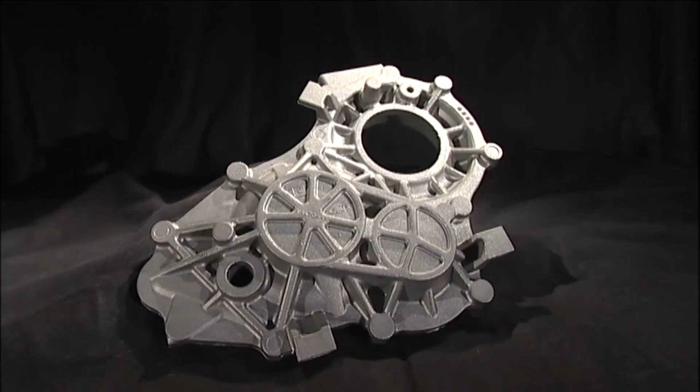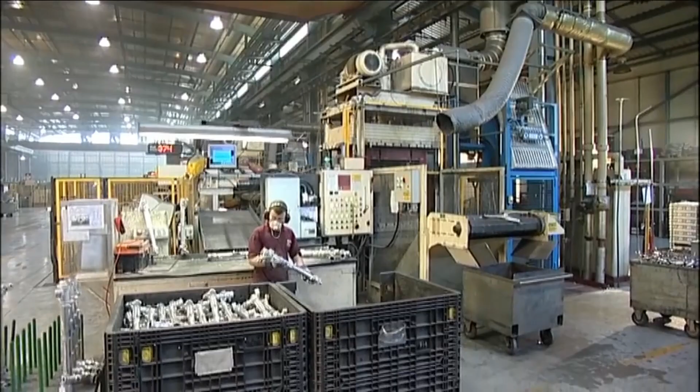The aluminum casting industry plays a major role in the automotive and aerospace markets. It is witnessing considerable growth due to advancement in technology and rising demand from the transportation sector. The electric vehicle market, in particular, is driving demand for high-strength, lightweight materials that can replace traditional steel.

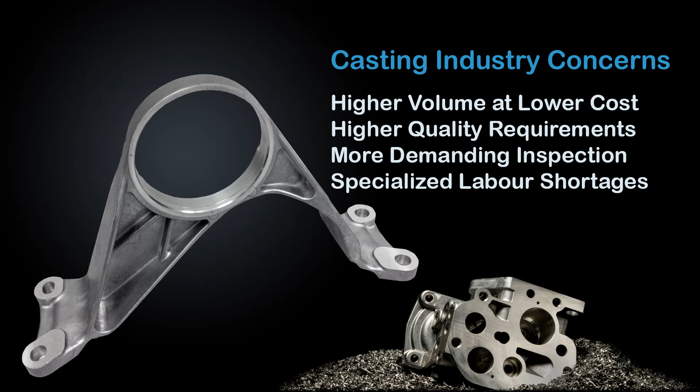But this trend faces major challenges. Part manufacturers are expected to produce more parts at lower cost, while meeting higher quality requirements. Safety concerns and increasingly complex design make part inspection more demanding, while specialized labor shortages add pressure on part manufacturers.

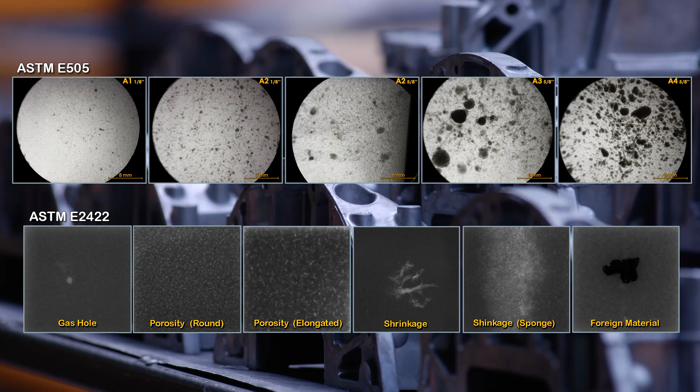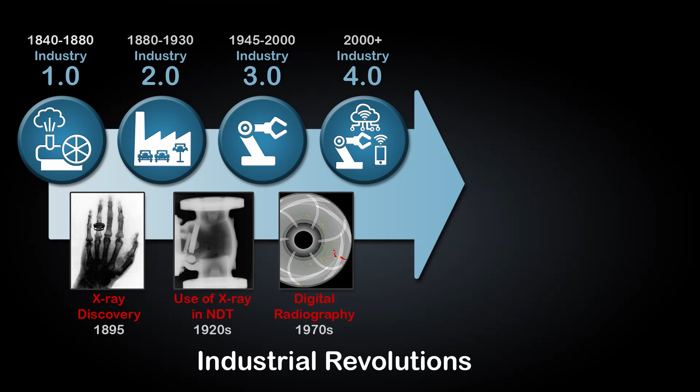Casting imperfections are unavoidable as they are inherent to a complex process very difficult to master. X-ray technology is the preferred inspection method for castings since it can see these imperfections. X-ray has been around for more than 100 years. In recent years, digital technology has significantly improved industrial X-ray capabilities, but despite the introduction of more advanced technology, inspection methods have remained essentially the same.

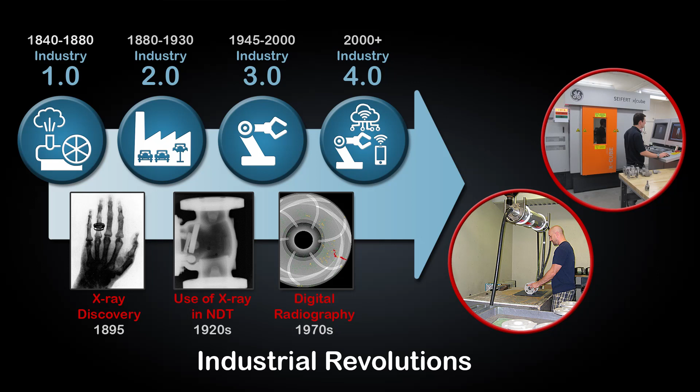Radiography is still considered to be a labor-intensive and a very costly inspection process. There's got to be a better way. This is where predictive 3D radiography comes into play. Predictive 3D radiography is our patented technology that combines X-ray physics with 3D analysis, simulation, and artificial intelligence.

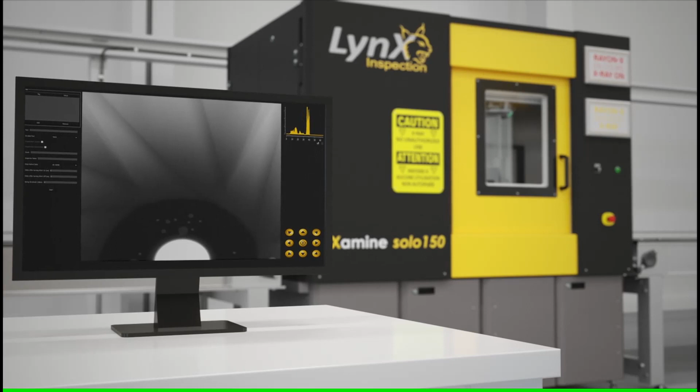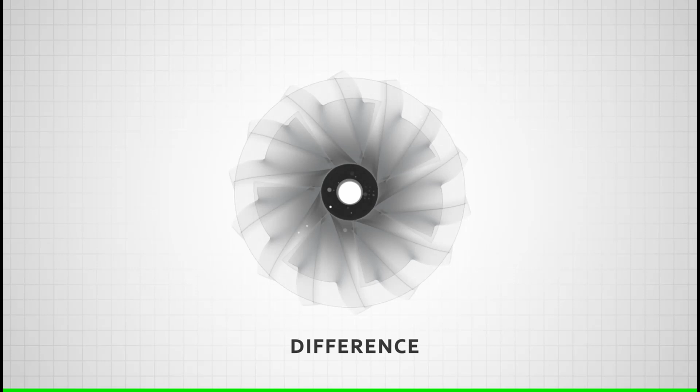It fully exploits all the available information to provide unique automated capabilities that are efficient, very fast, tailored to client needs, and much less expensive than traditional methods. Based on inspection standards and business rules, it delivers comprehensive results that can easily be interpreted by the end user or drive a fully automated inspection process. With predictive 3D radiography, 100% inspection is now possible and cost-effective, even for high-speed inline applications.

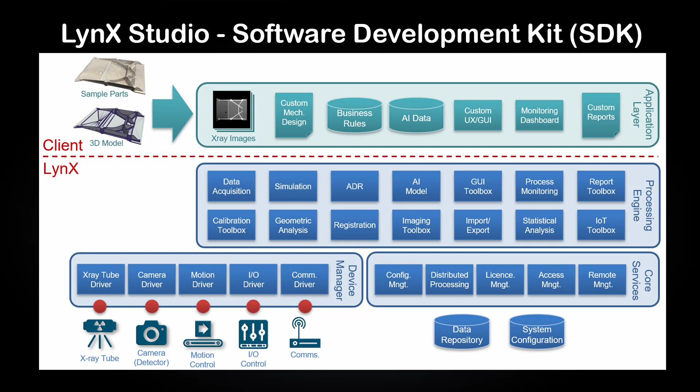What's making all this possible is LynX Studio, the very first software development kit designed specifically for high-performance industrial X-ray inspection applications. LynX Studio is a computer vision library with all the individual software modules needed to build custom X-ray applications that are modular, vendor-agnostic, highly scalable, and that take full advantage of the parallel processing power of GPUs.

The framework in LynX Studio uses stateless programming principles, where each component is available through an object-oriented data structure. Individual modules are called programs that can be configured and executed independently from each other or in a predefined sequence. Programs are attached to stations that connect to devices before execution. Each device can easily be configured through a set of parameters.

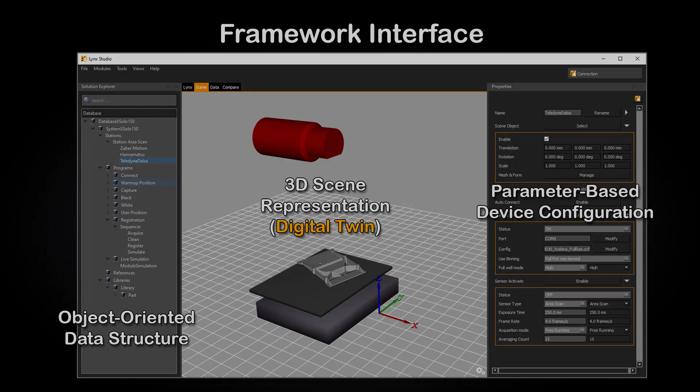Programs can be executed from within the framework, from a dedicated GUI, through command lines, or even a web interface. The same program can be executed more than once, and multiple programs can be run simultaneously. One of the key features of our SDK is a real-time X-ray simulator. The simulator can be used to provide a digital representation of the real-world conditions, also known as a digital twin.

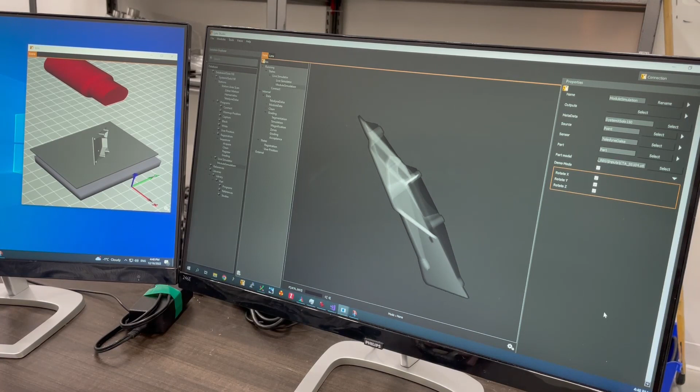A digital twin can be used to validate scanning parameters, find optimal viewing angles, or test the individual steps of a workflow sequence, for example. But simulation is also used in other areas, such as helping with image registration and 3D positioning, performing scaling assessment, finding anomalies against a reference model, and even building multiple test cases to optimize deep learning model training.

But the best way to demonstrate the real power of the SDK is to show a real-life example. The following demonstration shows how a sequence of events are being used to generate automated defect detection results. Taking a sample aluminum casting, the program starts by positioning the part in the cabinet to acquire an X-ray image. It then cleans the resulting image based on calibration data, then performs a registration of this image in 3D space and generates the corresponding 2D projection and scaling map that can be used for grading.

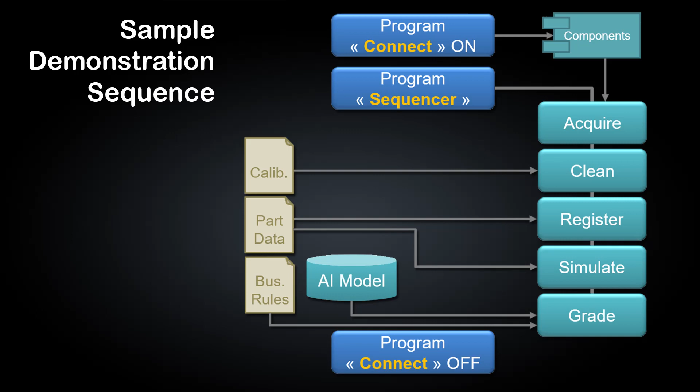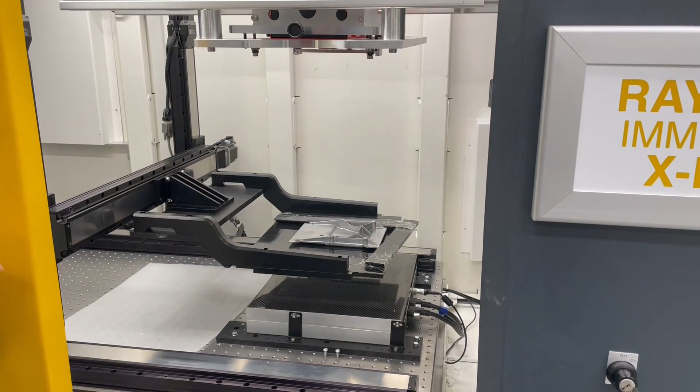Finally, it finds all the individual indications using the deep learning AI model and grades the overall part by assessing these indications against the reference standard and business rules. First, we place the part inside the cabinet and close the door. We're now ready for scanning. Then we activate the program.

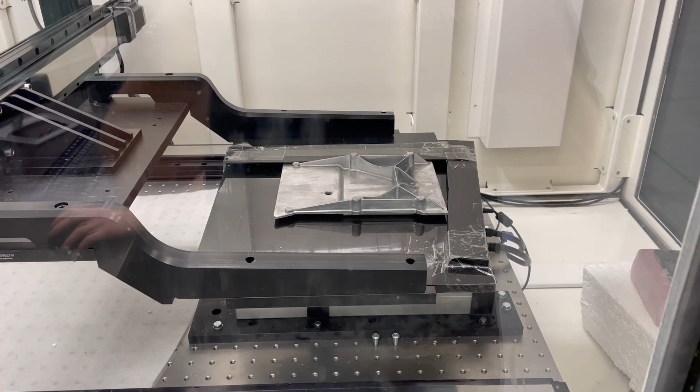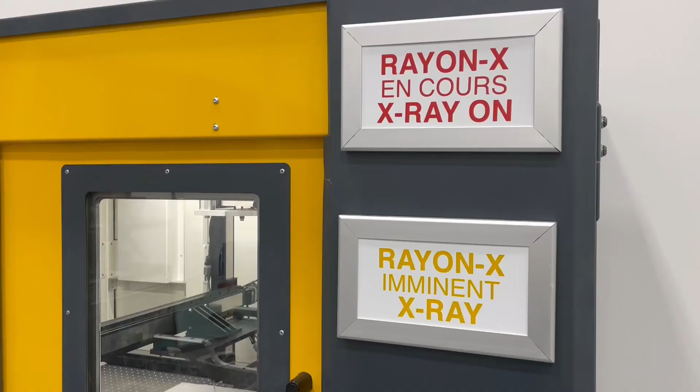The part moves into position. X-ray is turned on and the image is acquired. From there, all the processing steps take place in just a few seconds. Total elapsed time between X-ray on and grading results is around 14 seconds. All the intermediate results are available for review.

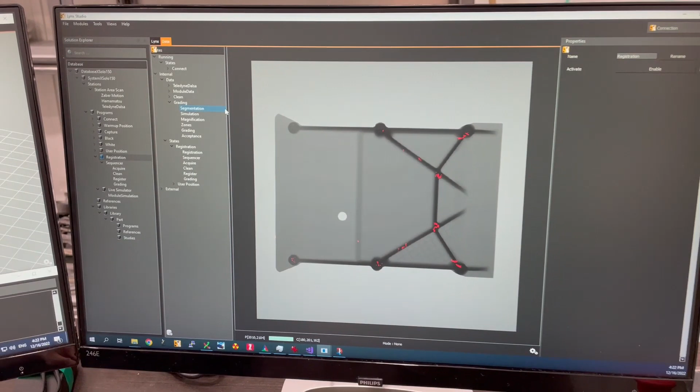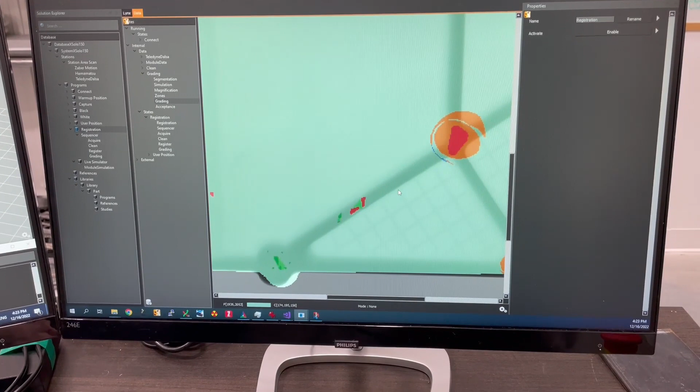These include the segmentation results, the simulated image, the magnification map, the projected regions of interest, and of course, the overall grading results. As we can see, some of the indications exceed the acceptance criteria and show up in red, while other indications are acceptable and remain in green.

Note that this program will work even if the part is tilted and rotated. Let's demonstrate this through another scan. As we can see, the new results reflect the new position of the part. And the 3D scene gets updated with the tilt angle that was detected by the program.

This is only an overview of what this framework allows us to do. We can use the same tools to support more advanced inspection solutions, such as 3D defect positioning using multi-view imagery, or fully automated inline inspection solution using multiple sensors capable of surface and subsurface defect detection.